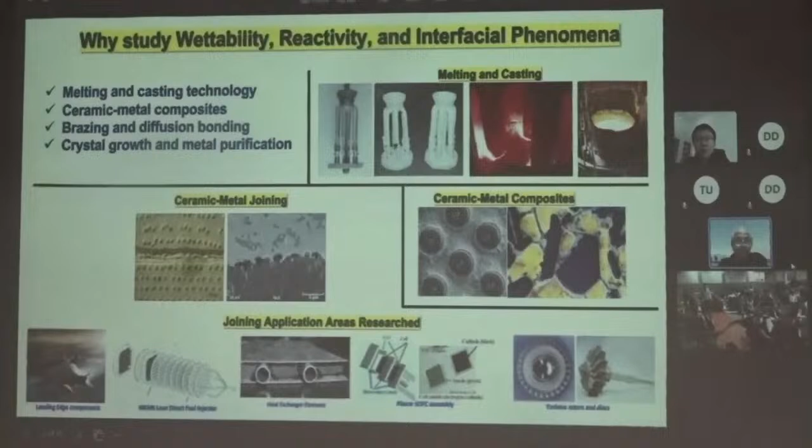Fundamentally, we know that we have reactions, infiltration and adhesion kinds of problems in liquid solid systems. We also have issues of residual stresses because of thermoelastic incompatibility between bonded materials. So we have several different methods to overcome those issues. My focus today is more on the fundamental side, the wettability and reactivity side.

There is a lot of literature data from the 1930s onwards in Ukraine, Russia and other countries. A lot of work was done on wettability at high temperatures. But the problem is that the data are all over the place. Here is an example of literature data on the aluminum-alumina system. If you look at the contact angle versus temperature, the numbers are all over the place. You cannot really make sense out of it.

Part of the reason is that there are no standardized test methods for characterizing interfaces and wettability. Another reason is that contact angles are extremely sensitive to testing conditions. So effectively, you can actually use contact angle measurements to probe the surface and interface. The contact angle is basically the angle that you see between the liquid and the solid through the liquid region here.

Unlike low temperature systems where there is hardly any reaction other than adsorption on the surface, high temperature systems show very complex phenomena. Here are some examples that we have been looking at. Aluminum on carbon: you form aluminum carbide by exothermic reaction, and the carbide crystals are actually ahead of the liquid, so the liquid is spreading on a modified surface. In other systems, like nickel aluminum on magnesium oxide, there is reaction and whisker formation.

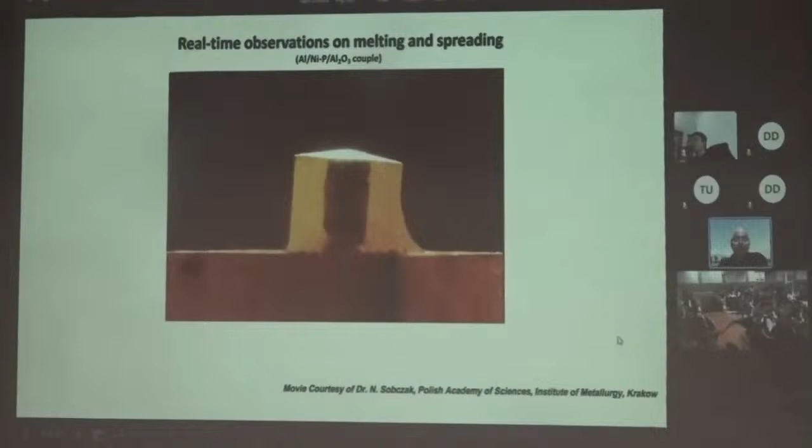So we have been working with this machine jointly and wanted to show you some video clippings here of liquid metal spreading on solids. Now this is just a 2 or 3 millimeter diameter droplet that is spreading on the solid surface here. We know that little droplets have oxide skin. So here looking at aluminum on an alumina substrate with nickel phosphorus coating, look at what happens to the oxide layer here.

You will see that the oxide is really tenacious and the liquid is actually beginning to seep under it. So essentially the oxide forms a cap and liquid begins to spread underneath. And this is just a very small droplet, 2 or 3 millimeters in size, under really high vacuum at high temperatures. So these are the kind of issues that complicate measurements of wettability in many systems. So how do you actually examine these things?

Well, let's look at another example here. You're looking at how at high temperature the oxide will actually disintegrate. You can see the little particles of oxide broke off and you have a cleaner surface here. And this is not just because of high vacuum; even under this vacuum you will have an oxide skin, but the temperature was increased above 1000 Celsius. So there was oxide dissociation.

So how do you handle some of these problems? Well, Dr. Sobczak has this special instrument where she's able to squeeze the little droplet on the substrate. In the normal sessile drop test, the solid is first brought in contact with the solid substrate and they are heated in contact. But the problem here is that you have no control on the time because interactions will begin right in the solid state itself. So if you want to study the liquid-solid reaction, this is not a correct approach.

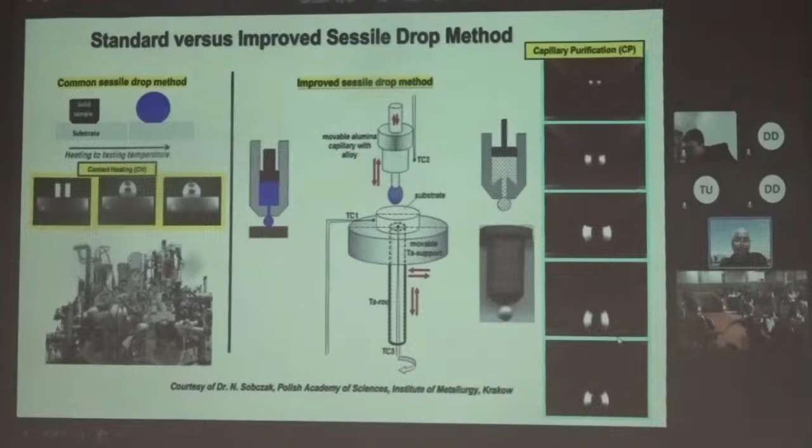So what is done here is the solid metal and substrate are independently heated and at some time they're brought in contact. So this kind of a test allows a more scientific approach to wettability study. So you're looking at a droplet that was squeezed out under high vacuum, and because of the squeezing action, the oxide on the surface was removed.

And when you look at the contact angle data, even at low temperature at 973 Kelvin, you're able to get the same low contact angle that you would have obtained at much higher temperature with contact heating. So what it shows is that a lot of things are happening at high temperature that we cannot really understand by applying the low temperature framework of wettability.

And this is just showing you the same thing, but we are looking at the bond strength after measuring the contact angle. So we let the droplet solidify, then we bisect the droplet and do a shear test to measure the shear strength. So what we have seen is that when you remove the oxide on the surface of the droplet, the bond strength really goes up, even at relatively low temperatures, as compared to if you had contact heating.

One of the things we have been able to do is to push liquid droplets on the surface. So this is actually nickel tungsten on magnesium oxide, not magnesium, but magnesium oxide. And under high vacuum, you are able to push the droplet and open up this interface after a fixed amount of time. And after cooling, you can actually look at the interface and see what kind of reaction occurred.

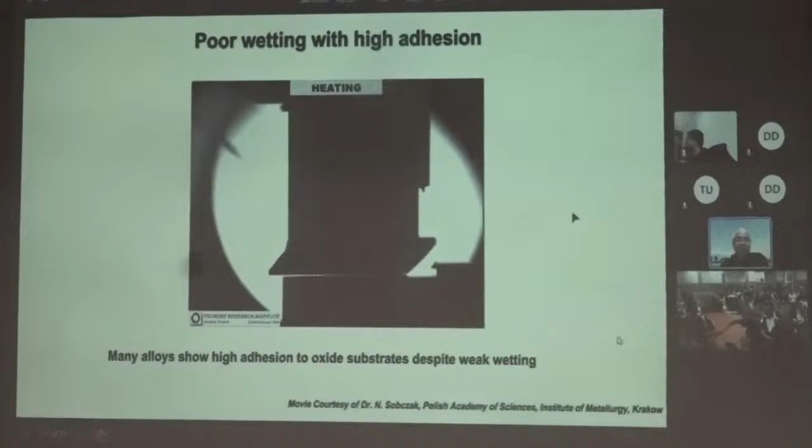Generally, we believe that for high bond strength you need good wettability, but that's not always the case. You can see here that this little ceramic plate gets bonded even though the contact angle measured was pretty high.

Another thing that we have been able to do is to use the drop suction approach, or we can actually rotate the substrate and see the effect of shearing on interface formation. So when we do the suction, after a fixed amount of time, the droplet is pulled out and we are able to open up the surface underneath. And this sample can be transferred right from the tester in vacuum to the X-ray photoelectron spectroscopy system, so it isn't exposed to atmosphere.

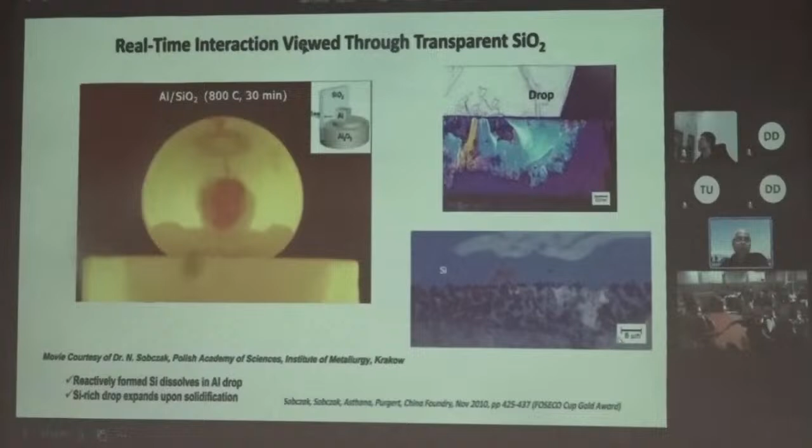Here you're looking at the real-time reaction between aluminum and silica. This is the silica plate, and you're seeing the reaction layer forming through the transparent silica substrate, so you can study in situ the interactions that are taking place. The same thing here: you're looking at several silica plates through which liquid aluminum is permeating and also reacting. The liquid is moving, the reaction layer is forming, so you can see the kinetics of spreading and the kinetics of reaction from this kind of system. A lot of things are happening that we don't see without this kind of instrument.

Another example is wetting and de-wetting. Under high vacuum, when this little droplet melts, there is some reaction taking place and tiny bubbles can form underneath. You will see the drop jump up and down because of the bubbles escaping. You will see that in a few seconds. This is what is happening now. The actual time is almost 30 minutes, but we have high-speed videos here. So there are a lot of effects taking place.

You can see this is an aluminum drop in contact with this magnesium spinel. When you heat it, you can see the bonding here. When you cool, the plate is actually lifted up because the bonding is very good.

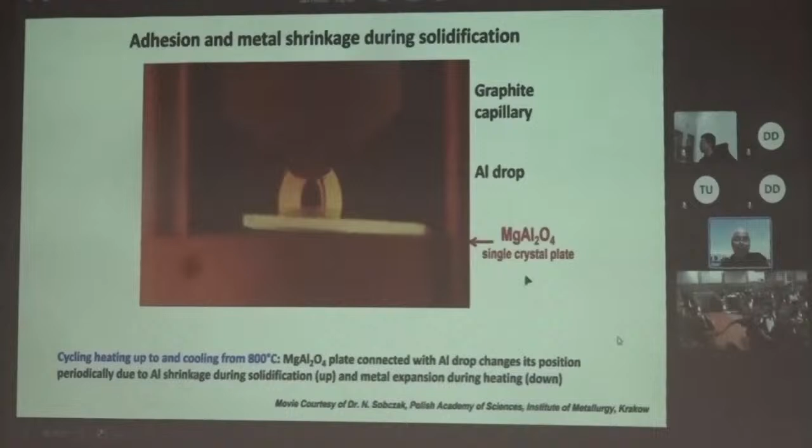Another thing we see is the real-time change in volume. Right now the surface is flat, horizontal, but with reaction it is changing. It is becoming more curved because of the reaction and volumetric change. You can see the surface of the substrate becoming more curved, and that is what causes the contact angle measurements to be in error.

So a lot of these things are happening, and we have been looking at some of these features, but I don't want to take too much time. It's already almost 11:30 here. So in summary, we are able to conduct some special tests that are not possible in the conventional sessile drop test, and we are able to observe some unusual phenomena.

So I just want to know, this droplet wettability problem is always there in composite making or in particles. If it is not properly wetting, then it does not make a coherent bond. So what are the ways you can improve the wettability of any particle when you are making a composite?

So people have been looking at many different things, starting with, I think, the 1970s or even earlier. Subrat Ray and P.K. Rohatgi at IIT Kanpur way back were experimenting with adding magnesium to aluminum. Magnesium, being a surface active element, is able to modify the surface and interface between the solid and the liquid. So magnesium is a well known active agent for composites. People have used different kinds of surface coatings on particulates, electroless coatings of nickel, copper, and other materials.

And if you have a nickel coated or copper coated particle, they will disperse relatively easily compared to uncoated particles. You have to also make sure to preheat the powders or fibers, or remove any sizing on fibers before you bring them in contact with the liquid. So preheating is important. And of course, sometimes preheating can change the surface structure. We have seen that if you have graphite particles and you preheat them, the surface gets modified, more porous. So those are some methods people have used to make composites and improve wettability. Those are practical approaches.

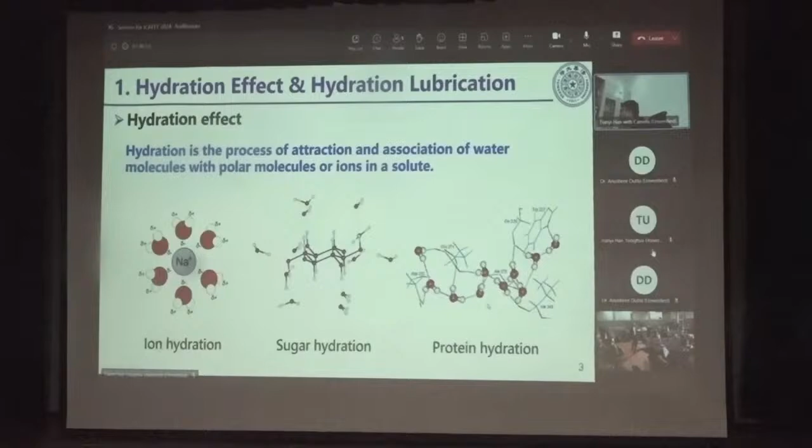Then, when a charged surface is immersed in salt solution, what will happen? The charged surface can absorb hydrated counter ions to form the Stern layer and the diffusion layer.

When two surfaces approach each other to a distance less than 5 Debye lengths, which describes the length of the diffusion layer, we can find a repulsion force called the electric double layer repulsion. If the distance decreases to less than 3 nanometers, another strong repulsion can be found, called the hydration repulsion or hydration force.

Due to this strong hydration repulsion between two charged surfaces, in this literature conducted by Professor Jacob Klein's group, they measured the repulsive force between two mica surfaces.

Here, these are two mica surfaces, and the mica is glued onto the silica lens. What they found was a strong repulsive pressure as high as 10 megapascals, when the distance between the two mica surfaces is very low, usually below 3 nanometers or below 1 nanometer.

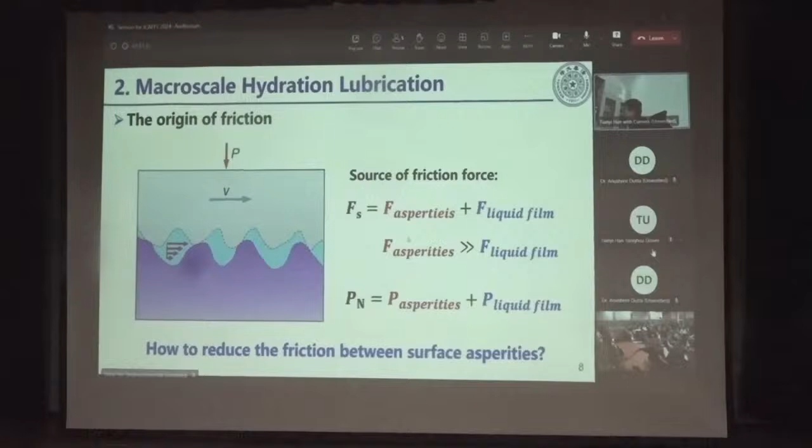Then we proposed a method to form a hydration layer on the asperities surface, and this hydration layer can separate the asperities by the hydration effect, by the hydration repulsion. Then the shear resistance should be reduced greatly.

So first we make a calculation, and we should prove whether it is possible to separate the asperities by hydration effect. We introduced the surface force into the mixed lubrication model, and the surface force consists of van der Waals force, the electric double layer force, and the hydration repulsion. I want to emphasize that the key is the hydration repulsion, because it is a very strong repulsion. From this we can calculate how many contact pressures can be supported by the hydration force.

Let's see the results. First, for the surface with roughness of 6 nanometers, as the surface potential increases, the bearing ratio of the hydration force also increases. And when the surface potential is -25, the hydration effect can bear over 60% of the applied load.

Then if we fix the surface potential at -20, the bearing ratio of the hydration force increases with the decrease of the surface roughness, and the maximum is over 80% if the roughness decreased to 2 nanometers. So from the calculation, we know it is possible to decrease the friction by hydration effect, especially in the mixed lubrication region, because the surface force can support most part of the applied load.

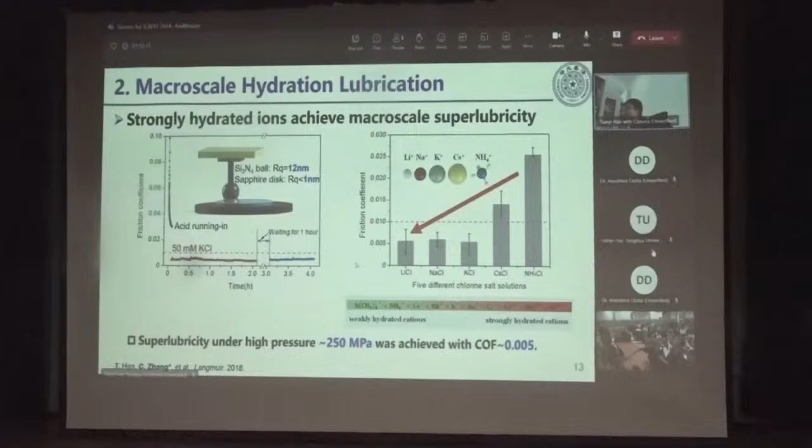By TEM observation, we found a tribo-induced silica layer was generated on the surface of the silicon nitride ball during the running-in period, and this silica layer can increase the surface charge density by more than 50%, which can make the surface absorb more hydrated ions and thus enhance hydration lubrication.

After that, we want to know whether the hydrodynamic effect can contribute to the superlubricity. The hydrodynamic effect means between the two surfaces there's a thick liquid film, and this liquid film can separate the two surfaces. We also did the test at different velocities.

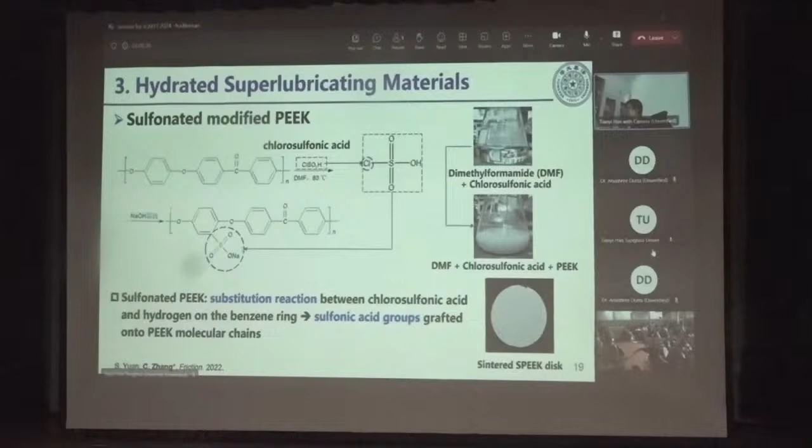Finally, we fabricated journal bearings with the sulfonated modified PEEK and tested them on the journal bearing test machine. During the test, the bearing was lubricated by salt solution, and we found the friction coefficient decreased to less than 0.01. After the test, there was almost no wear on the surface—in other words, the wear of the bearing is quite small. So this is a very good material to make journal bearings.

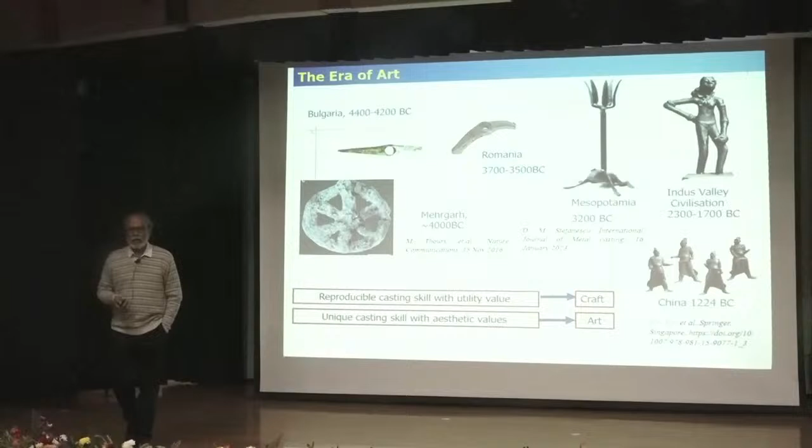So, in ancient time, there were two trends. One, producing reproducible casting with utility value. When you cast an axe or hammer, it has to be reproducible in terms of shape and property. And the other trend was unique casting skill with aesthetic value. Reproducibility was not mandate, but aesthetic value, that is surface lustre, reproduction of the desired shape was important. So that's how it started.

A good span of time, it was people who are engaged in basically these kind of casting, but there was no commercial value of it. There was utility value, aesthetic value. The commercial value started with casting type metal.

Johannes Gutenberg in Germany, he developed movable type printing machine, and it required founding types, letters, and he used lead-tin eutectic. That is a first use of eutectic alloy commercially. Earlier people were aware about the low melting point, fluidity of eutectic alloy, but commercially eutectic alloy, lead-tin alloy was used by Johannes Gutenberg in manufacturing type. And we know that this invention or application changed our civilization and Renaissance in Europe. That is basically the driving force for Renaissance in Europe.

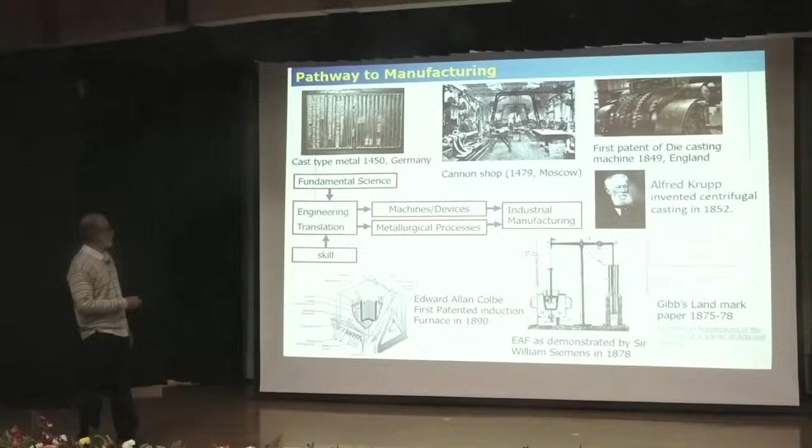And the breakthrough happened with the invention of the electric arc furnace by William Siemens in 1878, followed by the invention of the induction furnace in 1890, which we are still using and which are a major source of manufacturing castings. Okay.

So the second half of the 19th century and early 20th century was mostly popular for design and application of machines, right? And it was based on Gibbs' theory of solidification, and the concept was basically equilibrium. But people gradually understood that Gibbs' concept of equilibrium of heterogeneous systems doesn't work in practical application of solidification.

It is basically non-equilibrium. And a parameter which we are aware of, undercooling, was identified to describe the non-equilibrium features in the solidification process. It is a parameter which is not precise about the material or process. It evolves during the process through the contribution of several parameters like kinetics,

constitutional undercooling, which is basically a function of entropy and free energy; thermal undercooling, which is basically a function of enthalpy; pressure undercooling; curvature undercooling of the solid-liquid interface; kinetic undercooling, which is transport from liquid to solid. R is the radius undercooling, basically curvature. C is constitutional undercooling, then thermal undercooling, pressure undercooling, kinetic undercooling.

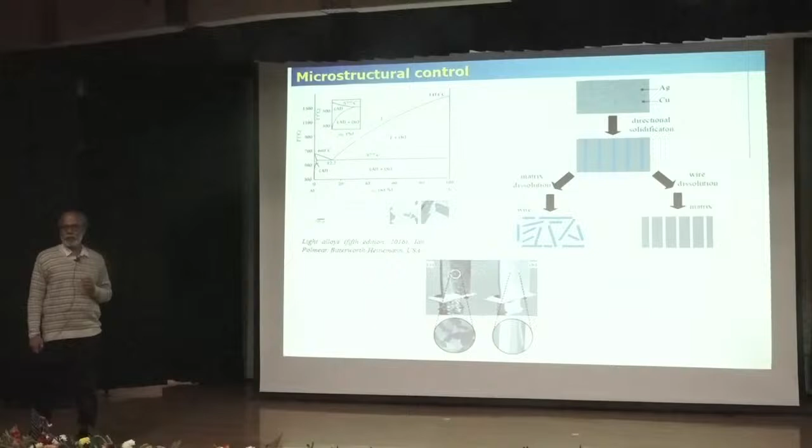Similarly, in aero engine or combustion systems, you need single crystals because there is a typical loading direction where polycrystals do not provide the necessary strength. Usually, when you allow the material to cool, it gives you polycrystal. And you can get rid of this polycrystalline feature by two methods. Either one, you remove the source of nucleation. You remove all the inclusions, all the precipitates, and you impose a unidirectional heat transfer. So that gives rise to columnar grains, and you have mostly low angle boundaries. So these are single crystals, which are very popular in superalloys for application in aero engines.

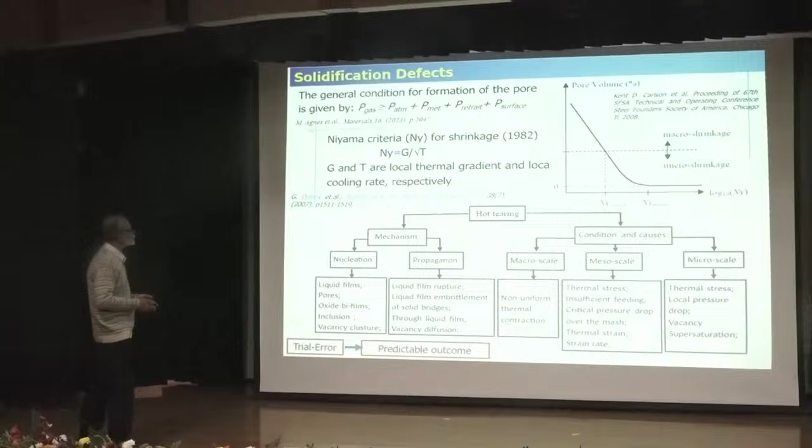Similarly, people determined different criteria for hot tearing, mechanism-wise and concerning conditions and causes. So what I mean, this is a stage. It happened during the second half of the 20th century when people deterministically started predicting the happenings during the casting process. It becomes a bit predictable. Earlier it was only trial and error, so gradually it became predictable.

And once people understood the happenings in the mushy stage, they were interested in getting rid of that. So Spencer and his group at MIT were conducting some experiments on lead-tin alloy to reduce the solidification stress. And they found, sometime around 1970, that when they apply shear stress, the solidification stress reduces.

And it was found that shear rate reduces the viscosity following this non-Newtonian equation, where K is the consistency parameter, n is the flow coefficient, and gamma dot is the strain rate. So they could find a way to reduce the viscosity in the semi-solid stage by application of shear.

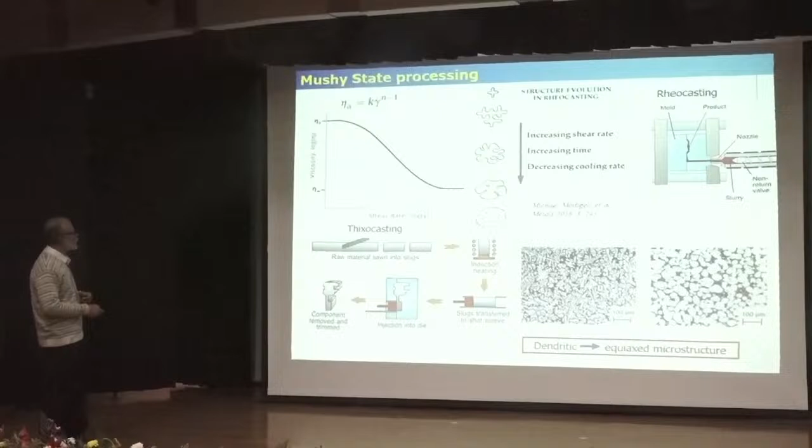Not only that, application of shear fragments the dendrites, and these fragmented dendrites provide nucleation sites for fresh grains. So they could transform the dendritic microstructure to equiaxed microstructure, and that opened up a new direction of processing liquid metal, which they call rheocasting, where liquid metal is forced with some shear force within the mold cavity. It is another version of die casting, but with some shear.

And the other is thixocasting, where a billet is heated between the liquidus and solidus line, that is the semi-solid stage, and forced into a die. So there are different varieties. Professor Amitesh Kumar is working on slope casting, where shear is applied during the movement of liquid through the slope. So there are different processes, but the idea is application of shear.

Now here, some more parameters came into the scenario apart from the shrinkage of the liquid, behavior of gas, convective percolation of liquid within the dendrite. It became the behavior of viscosity and stress of the liquid. So the constitutive framework of semi-solid casting is really complex, and it needs a strong mathematical framework to predict some outcome.

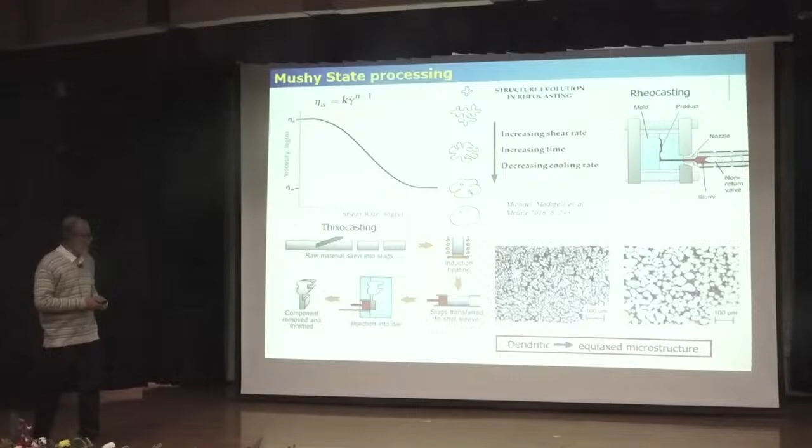And many people are now working in this area, so they are coming across such difficulties, but in the end, we can get rid of dendritic and columnar microstructure, and we can produce equiaxed microstructure. And by that, we can eliminate another step of heat treatment.

Another breakthrough in solidification. Sir, 5 minutes. Sir, 5 minutes more. 5 minutes more? Yeah. Okay, so I'll move fast.

People found that liquid can be supercooled even below the melting temperature if you increase the cooling rate, right? So in 1948, Kauzmann proposed that there must be a temperature, the Kauzmann temperature, above which you can cool the liquid and you can have an amorphous phase. And Pol Duwez at Caltech produced the amorphous phase, but it was a strip of small thickness with a very high cooling rate.

Later on, people started designing multi-component alloys and processing the melt so that they could eliminate sources of nucleation like impurities, etc. And they identified that there are some alloys. I'll go a bit faster. If you give 5 more minutes, I can justify that.

So there is a line which is the solid-liquid equilibrium line. So if you cool the melt within this region below a temperature, you can form glass. And this was the invention of Inoue, and of Caltech again, who could produce metallic glass with 10 millimeter diameter, some useful component. And this is the way you can reduce the cooling rate.

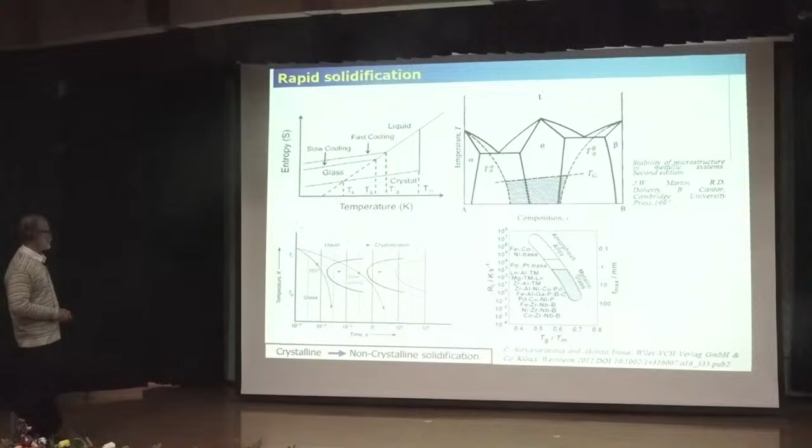I mean, change in slide taking time, that bonus I should have.

Yeah. So basically now people understand the solidification is not a unique phenomenon at a unique scale. It is a convoluted outcome of phenomena happening from nano to meso to micro to meso to macro scale. It is a convoluted effect. So it is basically a multi-scale phenomenon, and people evolved different mathematical frameworks to compute the phenomena happening at different length scales.

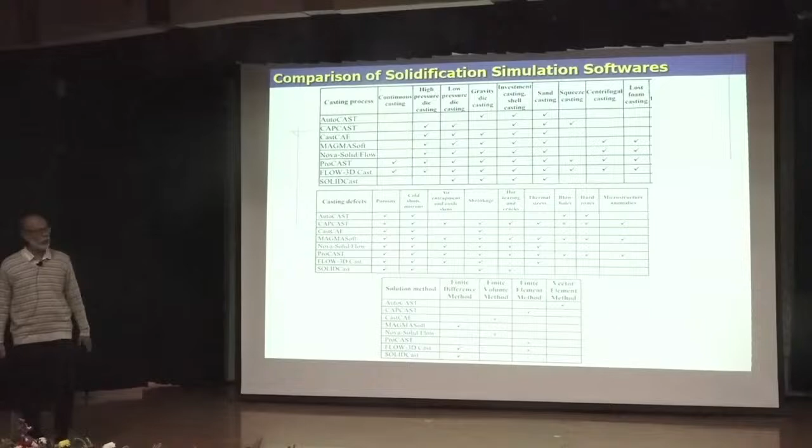So there is a range of simulation software which cover a wide range of casting processing methods and which can predict a wide range of defects using different kinds of CFD simulation software, either finite element, finite difference, finite volume, whatever it is. So with that, so far we have discussed the top-down process. We have discussed the solidification process, some bulk liquid filled in a bulk cavity, and we have allowed it to solidify.

Carl Deckard was a student of metallurgy at Texas University in 1980 when I took the admission. So basically he understood that there are three directions of metal shaping. One is solidification, the other is plastic deformation, and the third is powder metallurgy, sintering. And powder metallurgy is a bottom-up process. So it occurred in his mind, and at that time laser was very, very popular.

In 1970, laser was used for cutting titanium. In 1974, AVCO Everett, a company, evolved a machine for modification of surface using laser. So laser was very attractive, so he thought, can I use laser for sintering powders? And he proposed that to his supervisor, Joe Beaman. They started working together, and in 1987, they got the patent of laser-assisted sintering. And that opened up a new era

of processing metal components, where powder is either dispensed through a nozzle or laid on a plane and is energized by a laser beam, right? So it is a line of sight process. There is a focused, directed energy beam, which scans along a track, repeats the track, and completes a two-dimensional layer, and they build up one layer after another to build up the three-dimensional component.

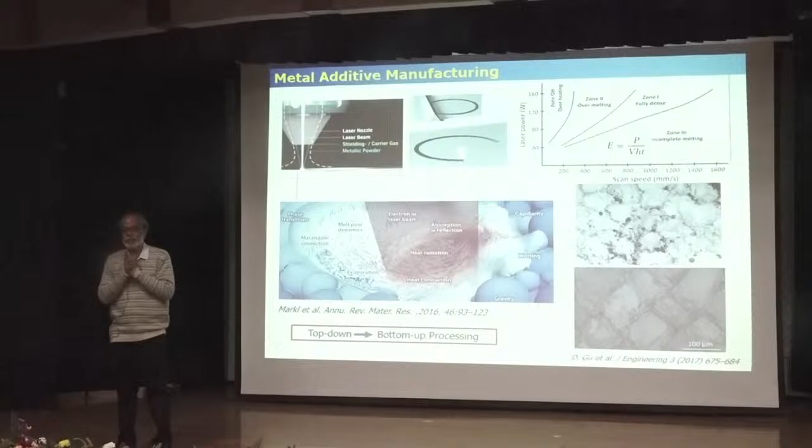You can have very good cameras, very good sensors, you can collect data, collect signals, collect images. But the processing should be very fast, so that when you are scanning one hatch, that data is processed to predict the probable defects there and to control the parameters of the next hatch to compensate for this defect.

Or it has to assess the defects supposed to occur in one layer, and during laying the next layer, you have to control the parameters which will take care of compensating the defect in the previous layer. That should be the kind of automation we are expecting in the future, maybe the next 10 to 20 years.

Then I believe this 3D printing will be effective for commercialization, where we will have products comparable from machine to machine, from one build to another, and from one place to another. That is where the market will rely on you - otherwise it has got no commercial value. Thank you very much.

Thank you, sir. And finally, so we have a nice session. This should be the goal of any manufacturing process. Are you happy to answer any questions? Otherwise, I'm available around.

Professor Chattopadhyay, it's a very brilliant presentation and a very brilliant study. You have done it in such an easy and lucid way that it becomes very easy for non-engineering people to understand the whole thing. And you have actually taken out 6,000 years of history of metal casting in a cup.

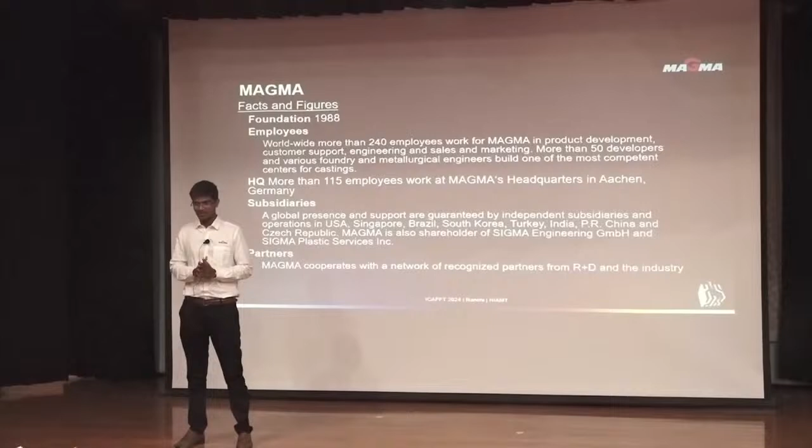Only when we have quality consistent casting can we improve the processes. Here comes Magma into play, where we offer a pinnacle software which enables you to utilize the tool to predict upcoming defects inside the castings. Not only defects related to porosities or restricted filling and solidification, but also related to stresses and deformations. We can speak about heat treatments, what can go wrong with them, and whether we fail to obtain the desired microstructure or mechanical properties. We can also define that. Apart from that, we can check the stresses inside the casting. Due to residual stresses, we have seen some cases of field failures, which we can also predict.

To brief about Magma, it was founded in the year 1988 by Dr. Erwin Flender in Germany, Aachen, where they worked with a small team of experts from metal experts and some developers. Today we have grown to 240 plus employees, working in and around the globe, making Magma's global presence. Apart from this, we also have R&D networks in and around the globe who are working with us to develop the software, aiding support and operations.

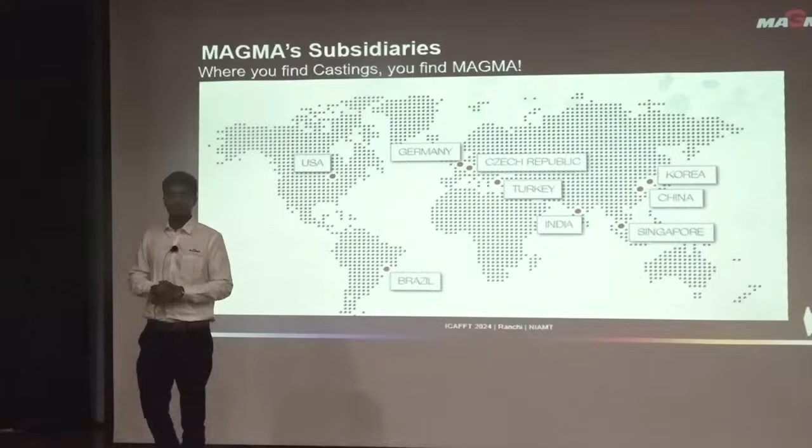We also have 9 plus independent subsidiaries in and around the globe, including India. We have been supporting their operations and developing castings, helping them establish a quality consistent casting premise. These are our customers in and around the globe. We have more than 3,600 plus customers with multiple licenses opted by each. In India, we have more than 136 plus installations with multiple licenses opted by many individuals. And in India, we have a code delivered by the customers: wherever they find the casting, they find Magma.

This is Magma's running history from the past 35 years. It started in 1989 at GIFA as a prototype, and with industrial demand it evolved, developing first a module in LPDC, then later HPDC, iron, steel, convection, segregation, heat treatment, and stresses. We have also developed some modules in CC castings.

In 2023, we came up with the 3rd generation software, which is giving a pinnacle again in prediction of defects in the foundry industry. And in 2024, just last month, we announced the latest update, 6.1, but it is yet to be released in the market industry.

Not just offering the software to use, we also provide training and support operations to customers who have purchased the software from Magmasoft India. Apart from this, we also have training sessions in our Hyderabad office, our headquarters in India, where we provide training with individual dedicated systems so you can use the tools and familiarize yourself efficiently.

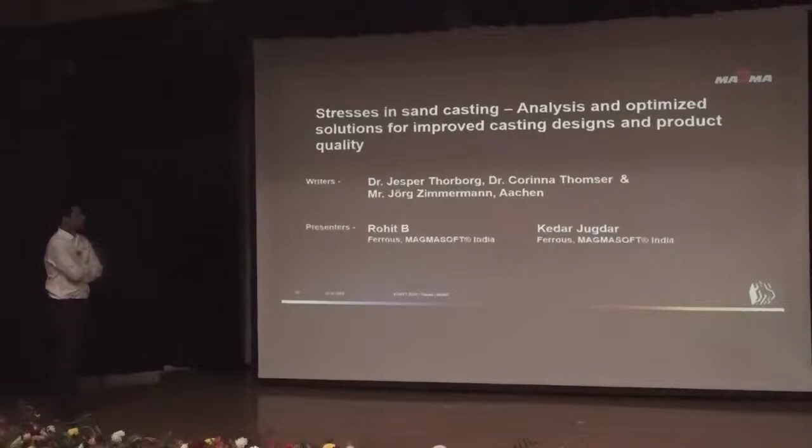Hello again, Johar, to all my NIAMT faculties. They have been very helpful for my academics. I did my master's from this college, so it is a pleasure to be here. This is a paper from Jesper Thorborg, Corinna Thomser, and Zimmermann from Aachen, Germany. We are presenting it on their behalf.

In this paper, we are going to talk about stresses in sand castings and the challenges we face. There are a few case studies we will talk about. First, what are the challenges we face in castings?

Basically, we talk about the stresses which develop during solidification processes. This is a versatile process everybody uses, and design complexity means we can also cast complex designs in sand castings. Stress defects, if we talk about them, are majorly cold cracks and hot tears. So what do residual stresses look like?

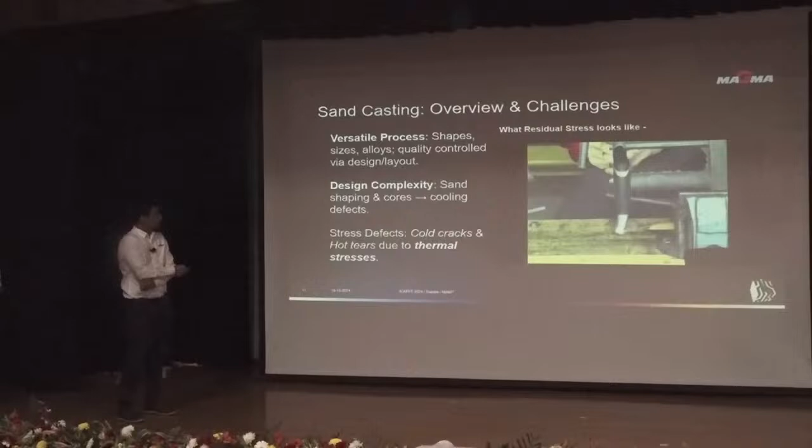This is a demonstration video showing how catastrophic a residual stress break can be, which needs to be eliminated before any supply to customers, because any field failure would be a catastrophic event. This is a demonstration lattice we will talk about, and we will check the simulation results, how we can eliminate them using these tools.

So what are the benefits? Obviously quality assurance and also dimensional accuracy, if we talk about stresses, because there are contractions.

So what do we get from stress simulations? First, in thermal interaction, metal contracts. Sometimes we have expanding sands, like green sands which expand a lot. The outer regions cool first, so that's why tensile stresses build up in castings. Later, during stress evolution while cooling, at high intermediate temperatures hot tears appear, and after solidus temperature there is a chance of cold cracks.

As you can see in the image, stress relaxation over time for large castings has a different impact on the stresses — we call it the creep viscoplastic effect. In large castings, because casting takes a lot of time to cool, stress relaxation per the creep effect will relax the stresses within the castings.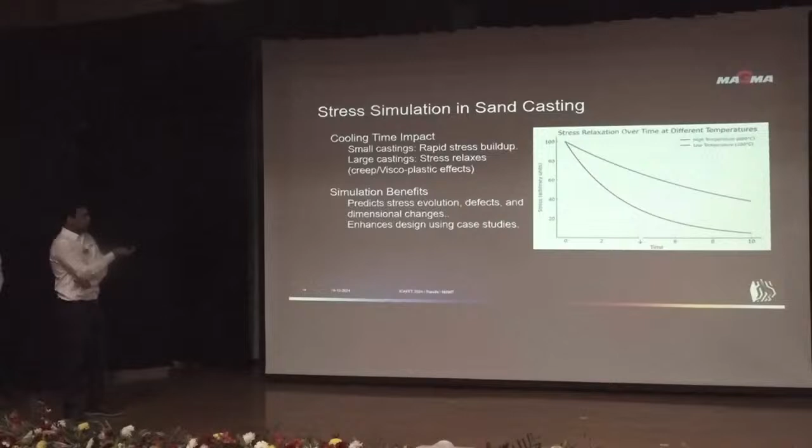So we will talk about a few case studies for large castings. What is the challenge? That is long cooling time. In these cases, we are not able to predict what relaxations are going to happen in our stresses within castings.

So for that we have a unified creep model which will predict time- and temperature-dependent behavior. Here is a case study of a MAN Energy Solutions casting, where the focus is on residual stress state prediction in a cast iron cylinder. We are going to validate a ring core method by milling, creating notches, releasing the stresses, and also simulating them with the software.

So what are the key findings? Stress measurements align better with the unified creep model.

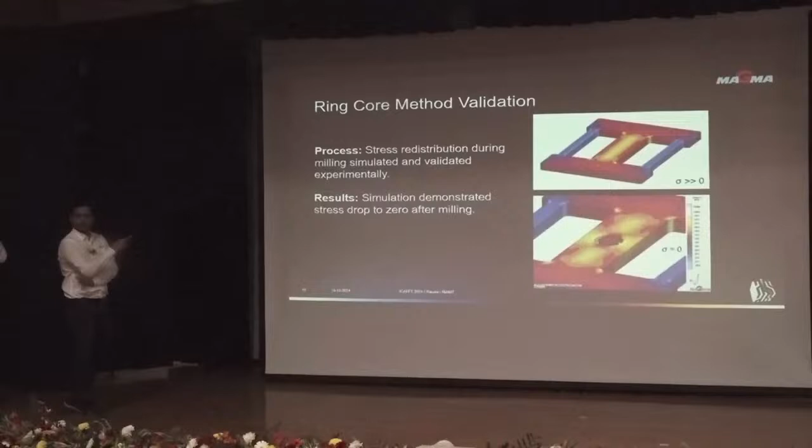This is an example we saw of how the stress lattice was breaking just from making a notch in it. So what happens when we simulate it as a whole piece? There is stress build-up in the thick section of the casting. Later, when we do a ring core method, the simulation demonstrated that there is zero stress remaining in that region.

So there is another case of a gray iron frame. Next, we have to locate the locations in the casting where we are going to measure. So in this casting, what was the challenge? A large stress gradient was detected during simulations. So the sensitivity of the measurement tools, like surface grinding and strain gauges, and the accuracy of where we are going to put them or measure them, needed to be evaluated beforehand.

As we compared the simulation results, there was a similar trend, but quite some difference in the absolute values of the results. But the finding was the critical areas which are prone to high stresses. So using simulation, we planned beforehand where we were going to put the measurements.

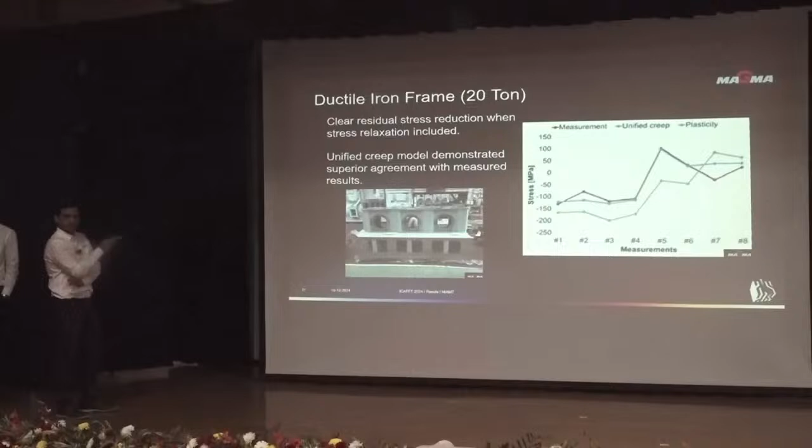So after learning from the previous example, we took another case of a ductile iron frame. We clearly pointed out the places where we were going to use those gauges. What we found is that the unified creep model demonstrated superior agreement. The curves that are matching demonstrate the creep model results.

So what were our observations? The unified creep model successfully showed us the relaxation and how it happens in large castings. The ring core method is very effective, but very sensitive to preparation and measurement location. So we have to identify the locations before doing that.

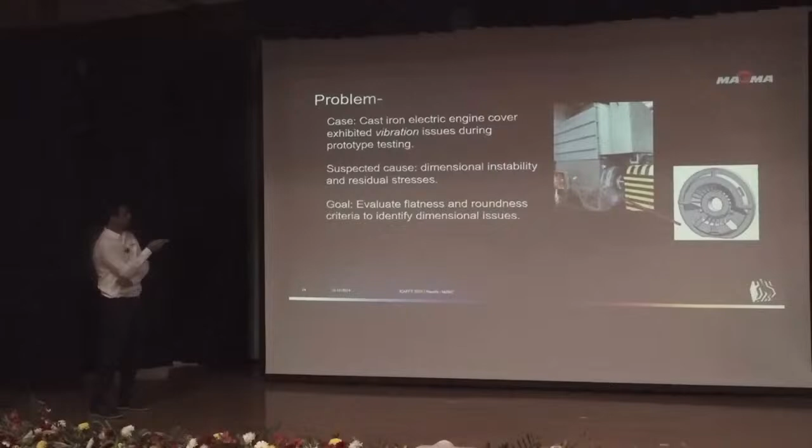So what are other things in stress modules? We always have to fulfill dimensional requirements in castings, such as flatness and roundness. So there is another case study: a cast iron electric engine cover. There were a lot of vibrations in it. During prototype testing, we suspected that dimensional instability and residual stresses might be playing a role. So the goal was to evaluate the flatness and roundness of that casting.

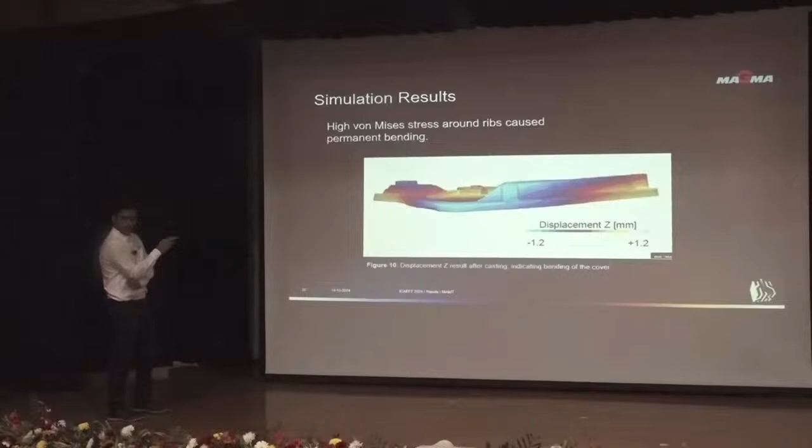So this evaluation showed that heat treatment was not needed for that casting, and there was a lot of money saved. And the vibration issue was unrelated to the process and was resolved by R&D without any process modification.

Another thing for stress is that we have to minimize hot tear risks in some castings. We use DOE, with variable designs, and do simulations on that. So what are the causes of hot tears? Uneven cooling causing thermal contractions, and poor feeding causing porosity. And the results of those hot tears are repair welding and high scrap rates.

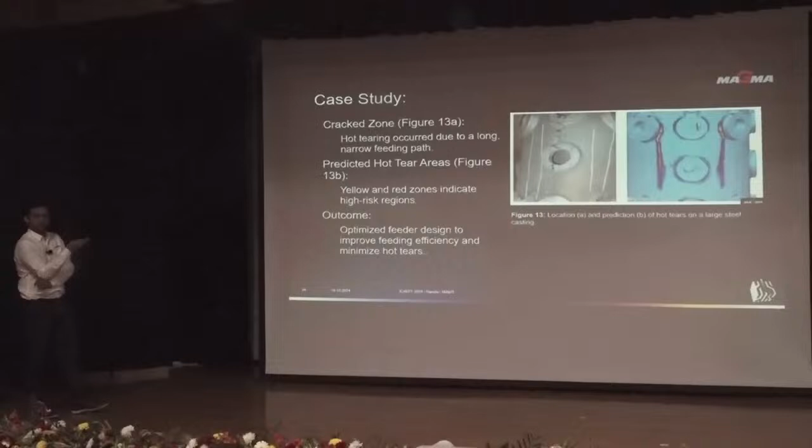So what is the solution? Thermal analysis and identification of the hotspots, and stress and strain analysis to identify the zones wherever strain is developing. We have to pinpoint those areas, and this is a case study where we were able to predict by simulation in which regions hot tears might form. In the actual casting we got the same results. The outcome was an optimum feeder design to increase feeding efficiency, and the reason was that narrow feeding paths were causing hot tears.

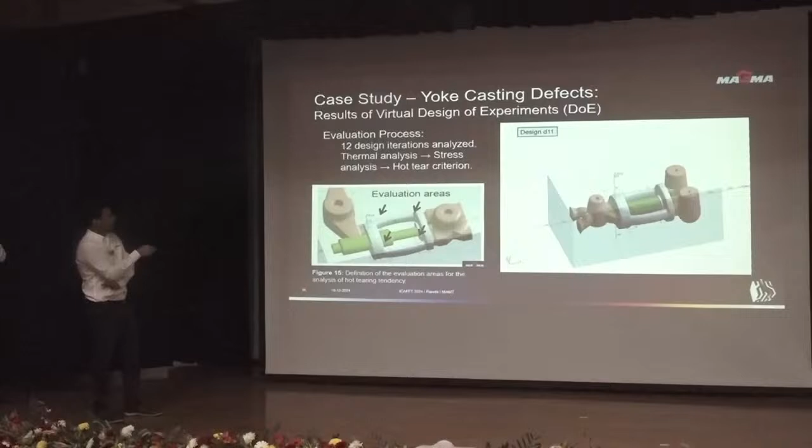Okay, so these are the 12 designs. We tried to change the riser locations and the feeding efficiencies of the risers. So what results did we get? These are the comparisons between all the results, where on the left we kept reduced porosity, and on the right we kept reduced hot tear.

There is an opposing trend: if we increase feeding, that reduces porosity but increases hot tearing, and vice versa. So what is the optimized outcome? In the middle you can see a compromise state where we have less porosity and less hot tear effect.

So this is the best possible compromise. And when we simulated that, what we found out was that the hot tear risk was reduced by 60% in comparison to the previous design, the feeder layout was changed around 30%, and the casting geometry we had to change around 44%. So this was the final result we got, and obviously there was no risk of hot tear anymore.

So, risk of cracks during machining. What happens is that the casting might be okay, but after machining we find that cracks have developed in the casting. So there is another case study where there is a large cast iron frame. It has several holes. Once we cast it, it was okay. But when we started to do drilling and other operations, a crack appeared and the casting got rejected.

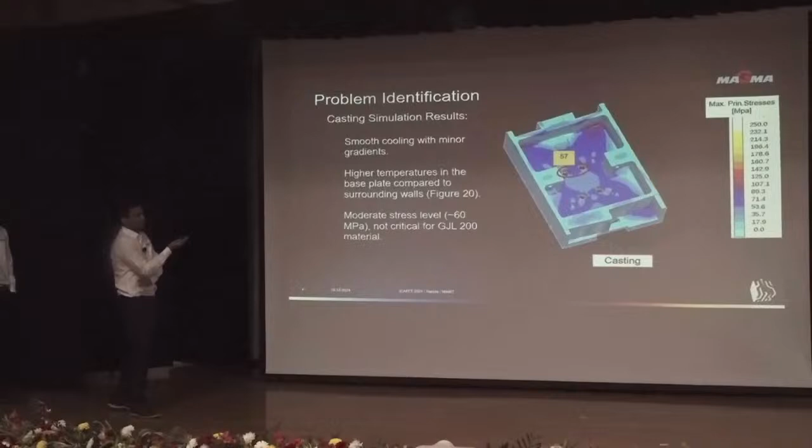So this is the as-cast part which we simulated. Here we find that only 57 MPa of stress is developed there. But after machining, we found that the region had around 234 MPa of stress. So it was having a crack issue in these parts. So what we did, we prepared 3 designs for different methoding and a few process changes.

In the first case, we put a chill between those holes to speed up the cooling rate of that region. Second, we filled those holes and we will machine the holes later. And in the third case, we increased the load carrying area, we added some extra metal to it. So what would be the best result? We will see.

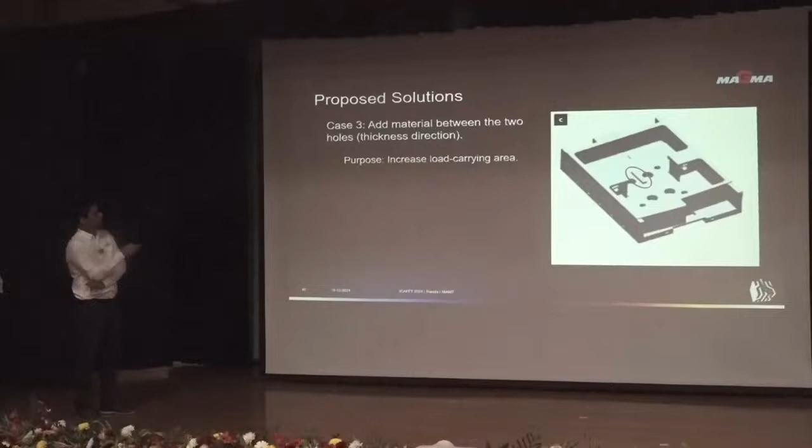So this was the original design where we were getting 234 MPa of stress at that region. But after putting a chill in the casting, it was reduced to 152. And we saw that when we filled the holes and later machined them, it didn't help much. And when we put ribs, there was no improvement either. So the best case was putting a chill between those holes only.

Another thing we can analyze in stress is when we quench the castings. So what do we get? This is a ring brake disc. We are going to use 2 different quenchants, one is water and one is oil, and 2 different quench conditions, one homogeneous and the second inhomogeneous. The objective is to minimize the distortion during the quenching process.

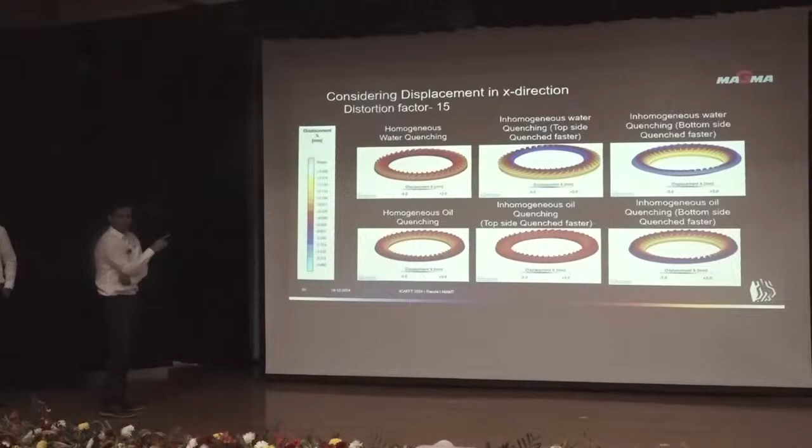So these are the permutations and combinations we get: homogeneous water quenching, inhomogeneous water quenching, and the same with oil. What we found is that in the 5th image we have the least distortion in the X direction. The distortion is scaled by a factor of 15 to visualize better. The maximum difference is only 1 in the X direction. So this is the best case for us, where the top side was quenched faster, and the other 5 cases were eliminated.

And there is one more thing, that is integrated distortion control in casting during heat treatment. This is a very big turbine blade, which has a size of 4.5 to 3.5. Our aim was to minimize the deformation during solidification and cooling and also minimize the deformation during heat treatment.

What we see here is that the initial maximum deviation was 22 mm. The images are a little blurred, but you can see by the color. But with pre-shaping, if you get the results from simulation, we can do pre-shaping CAD adjustments, and we reduced the deviation to 6 mm. So what was the outcome? We made accurate patterns of 6 blades, did 3D scanning, and found these results. The green color shows the simulation results, and the blue shows the actual measurements.

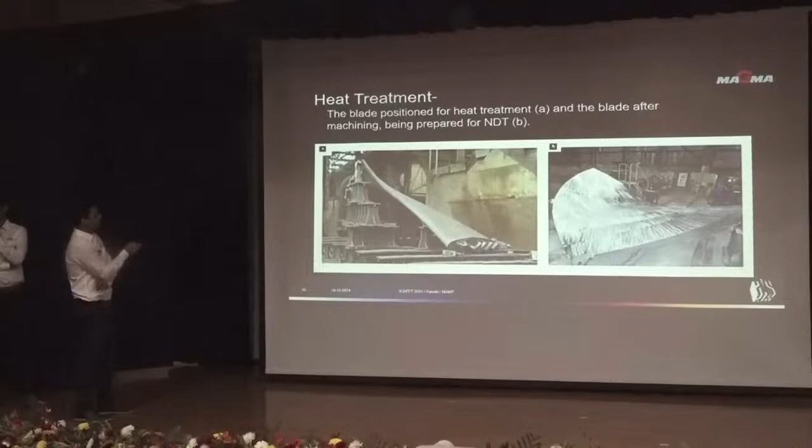So this is how the blades were positioned for heat treatment and, after machining, prepared for NDT. What we found is that during heat treatment, the relaxation at high temperature was very good in the core or thick areas of the casting. During quenching, stresses increased, but they were acceptable at the end of the cycle. It was only around 20 MPa, so that was acceptable in thick sections also.

So also the direction of deformation we got from the simulation, that it will be upward in center and downward in the thick sections. And the deviation of 6 to 9 mm was observed, which was within tolerance.

Okay, thank you, sir. Thank you. So both of you have presented nicely. So any questions? I think sir first asked something. Okay. Well, no, I mean, it's a good presentation.

What I feel, the simulation software we use works with the basic principle of thermal equilibrium and cooling rate. And what we look forward to is to have an even cooling rate all along the geometry of a casting, basically, right? So when we do the simulation for any component, we select the methoding through the simulation software, what should be the feeder, what should be the in-gates and all. We take care of all these things. And then we look forward to have a proper casting out of that.

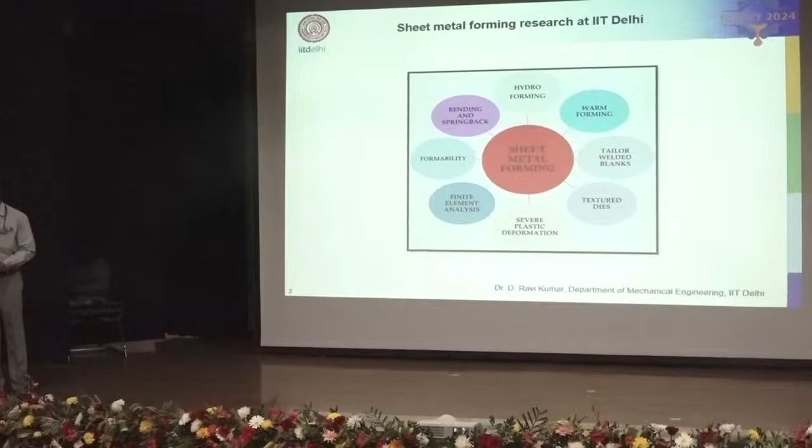So before I go to my talk, I'll just take 1 minute to give an overview of what we are doing at IIT Delhi. We have been involved in metal forming research at IIT Delhi for the last 26 years. My primary area of work is sheet metal forming, and within it we work on various aspects, both experimental as well as simulation work, including the finite element analysis of various conventional and unconventional sheet metal forming processes, formability analysis, prediction of defects and

spring back, and unconventional processes like hydroforming, warm forming, forming with tailor welded blanks, deep drawing with textured dies, and so on. We are also working on severe plastic deformation to enhance the properties of sheet metals. Apart from sheet metal forming, some of my students are also working on bulk forming processes such as rolling, extrusion, forging, and so on.

So these are some of the facilities that we have in our sheet metal forming laboratory at IIT Delhi. We have a customized formability testing machine, and a few hydraulic presses equipped with computerized data acquisition systems with tooling for various sheet metal forming processes. We have a laser grid marking machine for strain measurement, and a few software for simulating metal forming processes like QForm, Dynaform, AutoForm, so all kinds of forms. And then we have a cold rolling mill which is also used for cryo rolling of aluminum alloys, and a few other such facilities.

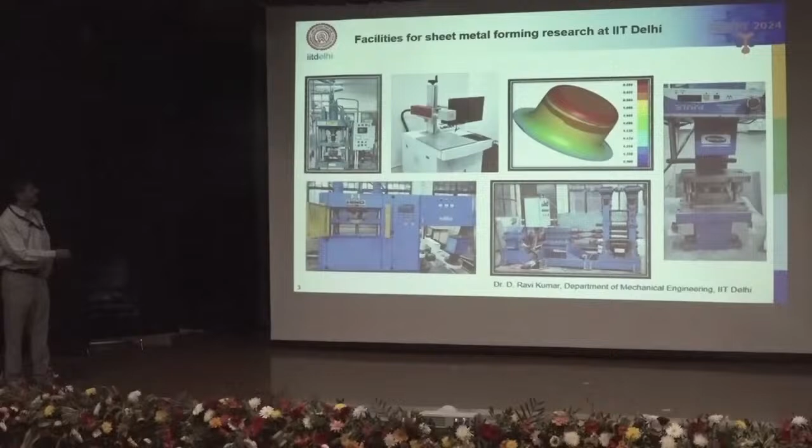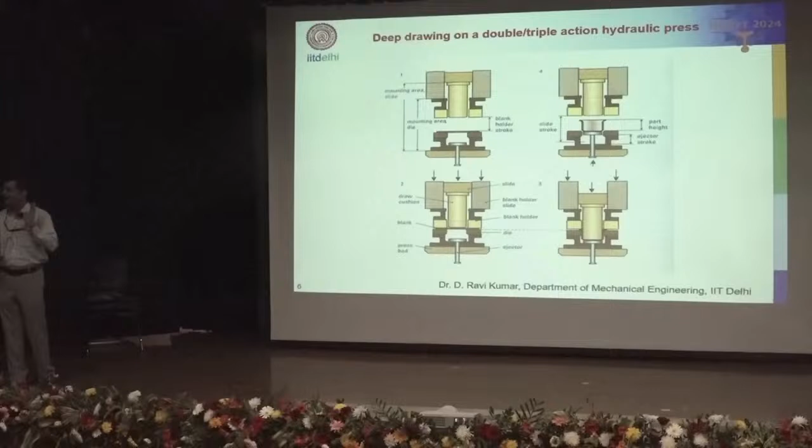So now, coming to the lightweighting of automotive sheet metal parts. In the automotive industry, something that everybody talks about is a lightweight vehicle. We want to bring down the weight so that CO2 emissions can be reduced, fuel economy can be improved, and so on. So how do we do that? Just as an example, a 10% reduction in car weight can lead to a 6 to 8% decrease in fuel consumption. And sheet metal parts like body panels and various tubular parts in a four-wheeler constitute about 30 to 40% of the total weight of a car.

And it's about 30 to 35% in a two-wheeler. So if we can bring down the weight of the sheet metal parts, the overall weight of the vehicle can also be brought down. So what are the different approaches for lightweighting automotive sheet metal parts? Some of those techniques I would like to discuss with some case studies, including our own work.

So one is, in conventional forming, it is possible to reduce the weight of a sheet metal part by reducing the initial blank thickness, either by using the existing grade, if it is not possible, or if we have a better advantage, we can go for an alternate grade and reduce thickness further so that we can bring down the weight. And second one is by using tailored blanks, either tailor welded blanks or tailor heat treated blanks, to achieve certain specific advantages apart from reducing the weight.

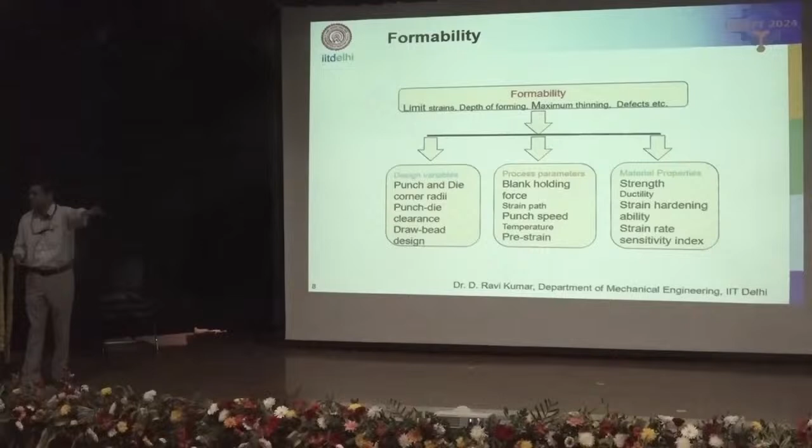Apart from the material properties, we are also concerned with design variables and process variables. When you design tooling for a given forming operation, the design variables are fixed at that stage. What you can control during the process is the process variables, like blank holding force, punch speed, the temperature, and so on. But unfortunately, we don't have any one single index to say the overall formability of the sheet is this much. We have a large number of tests to evaluate formability.

Similarly, there are many other tests, the Erichsen cup test, Fukui conical cup test, and so on. In every test, the mode of deformation is different, so every test gives you the formability of a material in one particular mode of deformation. But if I want the limit strains of a sheet metal in all possible modes of deformation, we evaluate a forming limit diagram or forming limit curve. This is a plot between major principal strain and minor principal strain measured on the surface of a sheet after deformation.

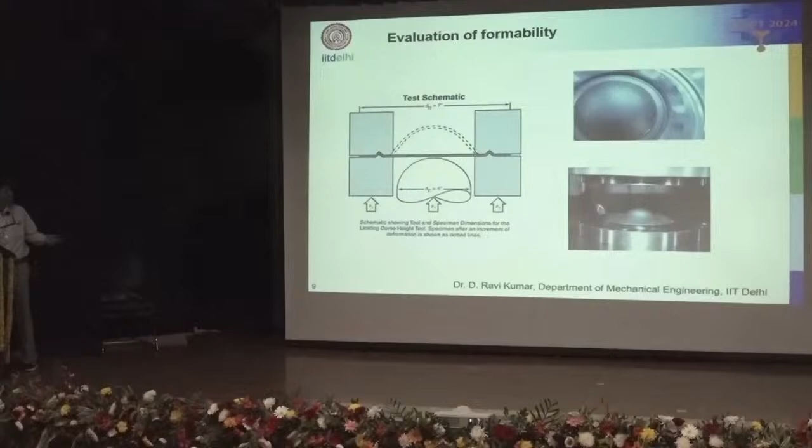This is presently being manufactured by most two-wheelers using one grade called extra deep drawing steel of 0.8 mm thickness, irrespective of the model and irrespective of the forming severity. So we tried a few different options to bring down the weight of this fuel tank, and yet it should meet the required functional

regulations. One option is reducing the initial sheet thickness with the same grade - what is the minimum thickness at which it can be produced? And if we change the grade to a better grade with better formability, what will be the minimum sheet thickness with which it can be produced?

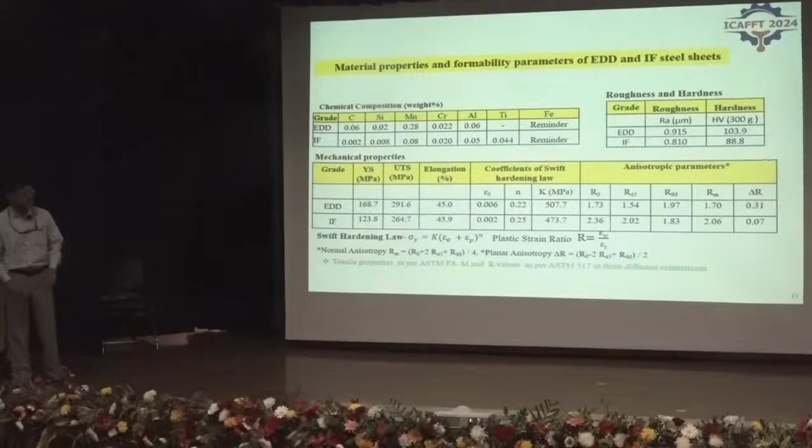You can see here the comparison of material properties, the general mechanical properties and formability parameters of these two - extra deep drawing steel, and the second one is IF steel, which is interstitial free steel. Even though the strength of IF steel is slightly lower than EDD steel, the strain hardening exponent and the anisotropic parameters are higher, indicating better stretchability and drawability, so the overall formability of IF steel is definitely better than that of EDD steel.

One of the major requirements is that in the final formed part, the minimum thickness at any point, at any location, cannot go less than 0.5 mm. So that was one of the requirements apart from the other things.

When we changed the grade to IF steel, we have seen by doing a large number of simulations that the sheet thickness can be further reduced to 0.65 mm. That would reduce the weight even more, but it would slightly cost more because IF steel is costlier than EDD steel. So we need to see where is the balance.

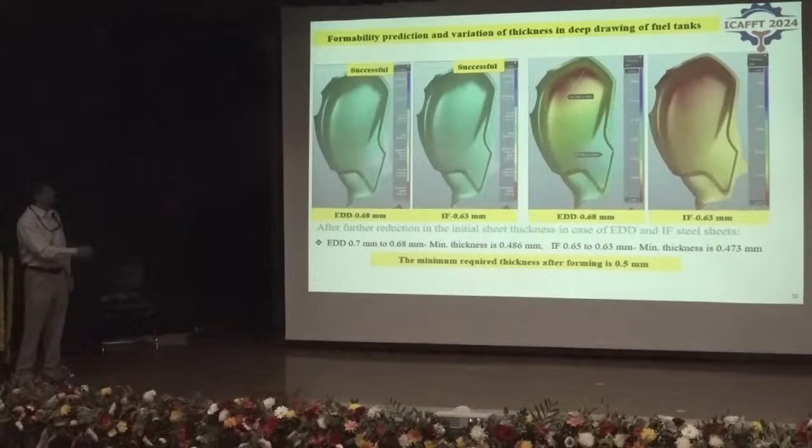So therefore, we finally concluded that 0.7 and 0.65 are the minimum possible sheet thicknesses at which the fuel tank can be manufactured. So then with these new thicknesses and the new grades, we have carried out the actual fuel tank manufacturing in the industry.

And the next alternative is to use aluminum alloys in place of steel. So we have chosen two aluminum alloys, both belonging to the 5000 series, because the 5000 series belongs to work hardening alloys. They have very high work hardening ability.

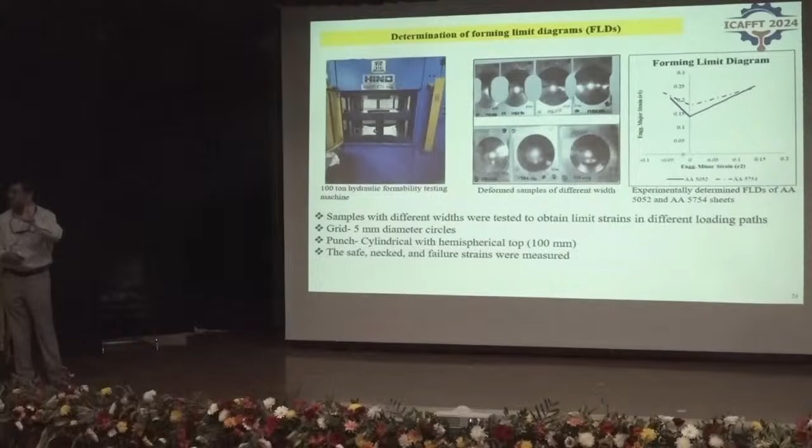So we started the simulations with 1 mm, and this is the determination of forming limit curves for both the materials experimentally, and these forming limit curves have been used as the failure criterion in the simulations.

And this shows the predicted results and the experimental results on aluminum alloys fuel tank manufacturing, the actual fuel tank. So we started with 1 mm. In both the cases, we were not able to form completely to the required depth. You can see 5052 failed when the part depth was 122 mm, and 5754 failed at 162 mm, whereas the required depth was like 180 mm.

So experimentally also you can see that there was a complete crack, and there was excessive thinning, and the material failed in both cases. This was anyway expected because the sheet thickness is equal to steel sheet thickness. And experimentally measured strains also, you can see they have far exceeded the forming limit curve, and this was what was expected.

So then we predicted formability of these two alloys for fuel tank manufacturing by enhancing the sheet thickness. So we went up to 2 mm, and for 5754 we found that if the sheet thickness can be increased to 2 mm, it can be successfully formed, and the minimum thickness would be 1.4 mm.

I know the aluminum alloys are costlier, and if you increase the sheet thickness, it would be even costlier. But the thing is that the weight of the component will still be lower even if it is 2 mm. But in the case of 5052, even at 2 mm, the predictions were unsuccessful forming.

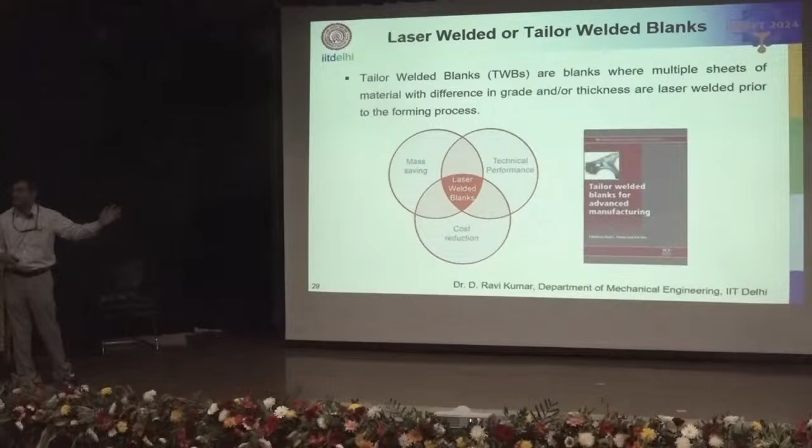In the 90s, it was a new concept, but now if you see, the tailor welded blanks are being used in various automobiles, in various four-wheelers and so on. So the main advantages of these tailor welded blanks are mass saving, cost saving, and better technical performance. You can see here some books are even written exclusively on tailor welded blanks for advanced manufacturing.

So this is the process details. Let's suppose conventionally this component contains 5 different parts, and they have to be formed separately and they are spot welded. But now using tailor welded blanks, what we can do is that we can choose the correct thickness or the correct grade for 5 different blanks, which are cut according to the required shape and size. Prior to forming, they're all laser welded, okay?

Because laser welding is a very fast welding operation, and it also gives you a very, very narrow heat affected zone. So after laser welding, this composite blank is formed into the final component in one single forming operation. So 5 forming operations have become one single forming operation, and all the subsequent spot welding operations have been eliminated. And so the process becomes much faster and easier.

More than that, the main advantage is that the design engineer now has a lot of flexibility to choose what kind of thickness he should use at what location, what grade of steel he should use at that particular location, so that he can tailor the blank according to the final functional requirements. So wherever you require higher stiffness, we can have higher thickness. And wherever you require higher strength, you can use a high strength steel grade, and in other portions you can have a low strength grade. So because of this flexibility, the tailor welded blanks have found a lot of applications in automobiles.

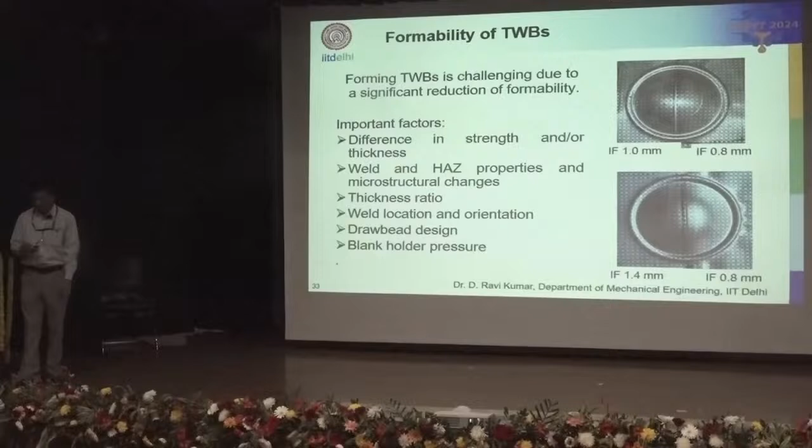Look at the weld and HAZ properties, the thickness ratio, okay, and the weld location and orientation, because the weld orientation is also extremely important. Here you can see examples of two parts where in one case we have a longitudinal weld and in the other one we have a transverse weld. So the orientation of the weld with respect to the direction of loading also plays an important role. You can see on the right hand side the tailor welded blanks which are like a normal sheet continuously.

So I will just skip this because I don't have much time.

So lastly, I talked about alternate forming processes for enhancement of formability so that we can further bring down the weight of vehicles. Since aluminum alloys are lightweight, we are always attracted towards them. But one major drawback is their formability at room temperature is generally inferior when compared to many low carbon steel grades. So therefore, one of the techniques to enhance formability of aluminum alloys is warm forming.

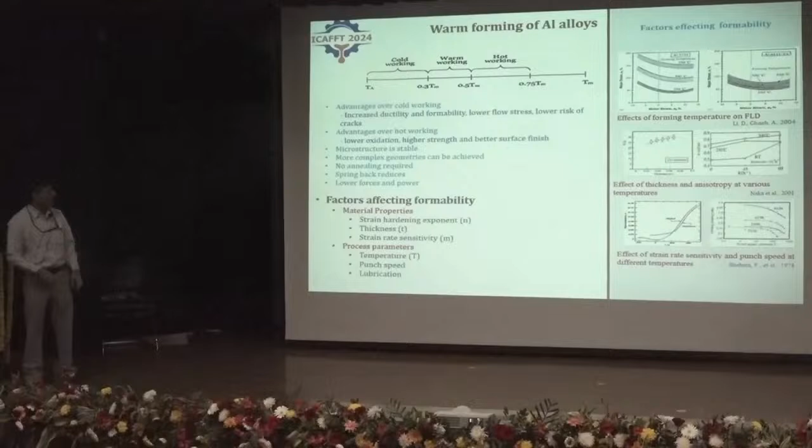But the parameters that affect formability in the warm working temperature region are much more complicated, because we have certain parameters related to high temperature. One is temperature itself, the other one is the properties which get influenced by temperature, mainly the strain rate sensitivity index. Because for most of the common metals, the strain rate sensitivity index at room temperature is close to 0. So the change in punch speed is not a major parameter. But when you are working at elevated temperature, the strain rate sensitivity becomes extremely important. So therefore, the punch speed and all that also become a factor.

So lastly, hydroforming is another alternate process which can be used to enhance formability of lightweight materials or materials with lower formability in conventional forming. Hydroforming is of two types. One is tube hydroforming, the other one is sheet hydroforming. In tube hydroforming, a tube is internally pressurized such that the tube bulges out and it conforms to the die configuration. Sometimes in addition to internal fluid pressure, we also apply axial load such that the material deformation becomes more precise and you can form accurate components.

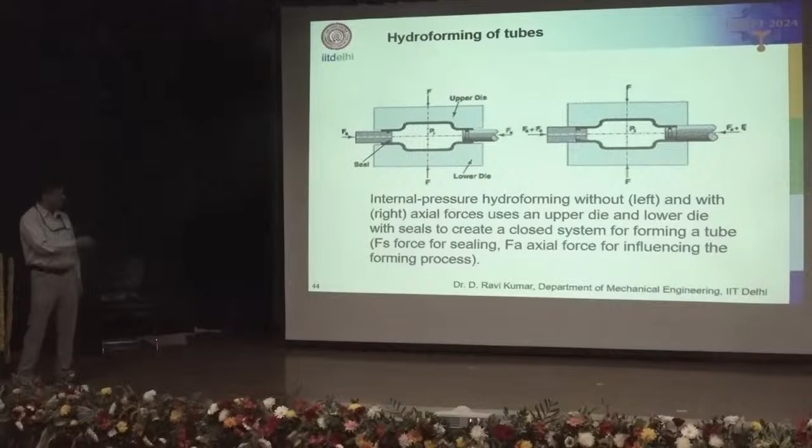So I am mostly interested in sheet hydroforming. In sheet hydroforming, we use fluid pressure to bulge a sheet or to draw a sheet into a die cavity. That is pure hydroforming. The other alternative is you form the component by a conventional mechanical force, and at the same time the sheet metal is subjected to counter pressure by the fluid. So that gives you some special advantages.

So lastly, I just want to show one more small case study. I'm going back to the same fuel tank again. Now we have considered a fuel tank with much larger depth. The young people know in bikes you get more intricately designed fuel tanks, and some of the fuel tanks have very large depth. This particular model has 220 mm depth.

So we have done simulations to see whether this fuel tank with large depth can be manufactured as one single component by hydroforming, which is not possible by conventional forming. And before that, we found out they are presently using EDD 0.8 mm steel, so we have used the same material so that there is no need for any change of material.

And we have found out initially from simulations as well as experiments, lab scale experiments, what is the maximum pressure up to which this sheet can be formed by hydroforming. And we have found out that it can go up to nearly 20 to 21 MPa, that is 200 to 210 bar. Okay. So after experimental validation of this, then we carried out the hydroforming simulations.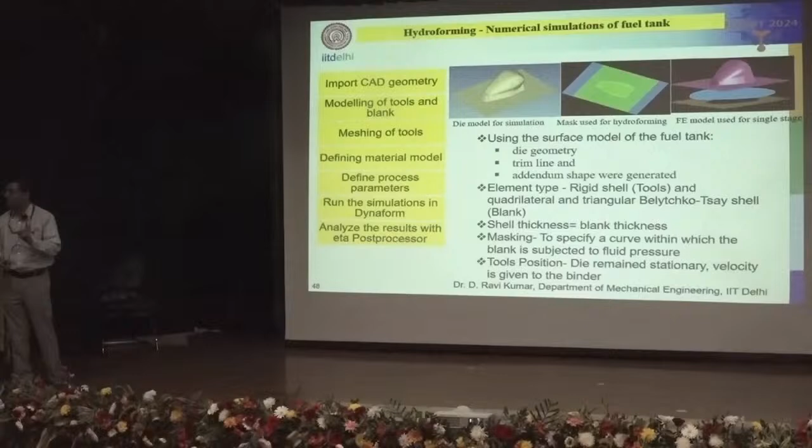And so since we were unable to form the entire depth in one single stage hydroforming, we have gone for two-stage hydroforming. In the first stage, we were able to form up to 184 mm, and then this simulation data has been imported as the initial starting data for the second stage. And in the second stage simulation, we could successfully form the fuel tank up to the required depth of 220 mm.

Okay, but the only problem that we have seen is that the minimum thickness after second stage forming has gone down below 0.5 mm, which is the present requirement for a fuel tank. So what we have thought is that by introducing an intermediate annealing treatment between the first stage and second stage, it is possible further to improve the strain distribution and reduce maximum thinning. So with that optimization, it will be possible to produce this large depth fuel tank in two-stage hydroforming with minimum required thickness above the required value. So this is just another case study for hydroforming.

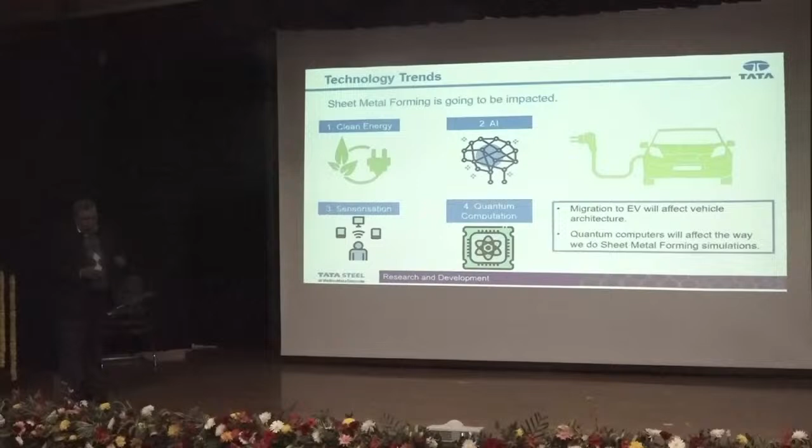Now, one immediate impact of this is, once the crash happens at the same speed, you have to absorb more energy. And the formula is very simple, half mv squared. So if m increases, the energy absorption capacity of the vehicle has to be increased, and therefore you have only two options. Either you increase the thickness, which will adversely impact the range of the vehicle, or you use high tensile steels, so that you absorb more energy without increasing the weight. Therefore, the steel industry has for some time now been working extensively in developing newer advanced high strength steels which can be used by the industry.

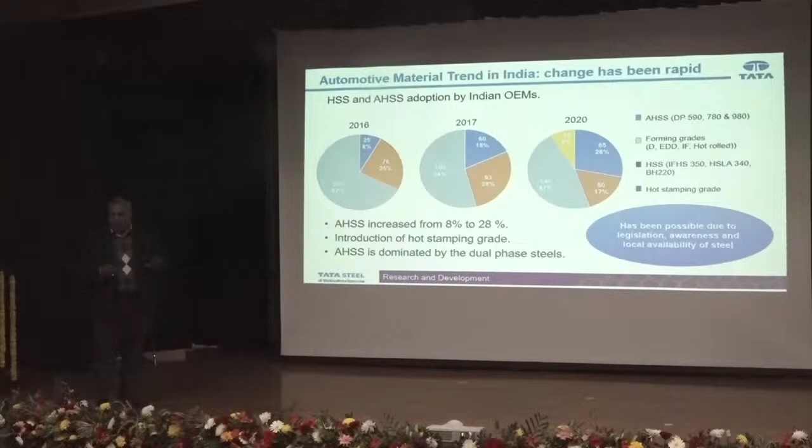But at the same time, if you look at the industry trend from 2016 to 2020, the usage of these advanced high strength steels has increased significantly. And this change has been much more rapid if you compare the rate of change with the European market. And the reason is much of the knowledge for both production and usage of these steels is now known. Initially, when these steels were being developed, produced and used, there were a lot of challenges. Those have been more or less addressed. So the information is readily available, so the adoption is much faster.

Now the thing is, why should a steel company actually work in that area? Like I said, we actually produce steel and sell a significant amount of steel to the automotive industry. So we also feel that it's our duty to also give the know-how for using these steels to the users: how to use these steels, how to solve the problems associated with these steels. And one of the most common ways of solving those problems is basically simulation.

Okay, the finite element simulation; a large part of that was already covered in the previous talk. However, there is a challenge. And the challenge is the simulation accuracy of the commercial software is still not that good for certain types of steel under certain conditions. So I'll just show you what those conditions are. But before that, I'll try to bring in the concept of a strain path, because I am going to use this quite a few times during my talk.

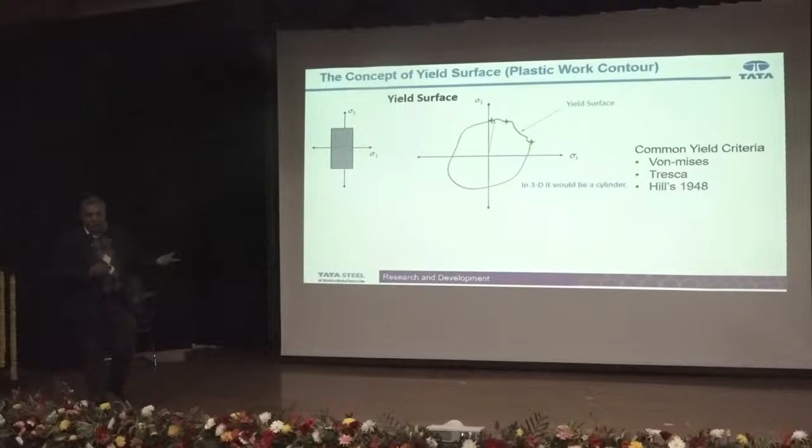Only thing is that they gave the equation, and later it was proved through experiments that each point actually lies on those surfaces. So actually we can give our own equation, right? The easiest way is just to give an nth order polynomial which will fit any sort of curve. However, this only tells you the initial yielding. What happens if you further deform it? So the evolution of this surface. This gives you the initial one, but there are two issues: the shape of the surface and the further evolution.

The shape is basically related to the texture of the material, because exactly what shape it will be depends on the texture. And further evolution is the hardening. Now the hardening is actually very, very complicated, because depending on what strain path you give, the further evolution is going to be impacted, right? However, it is very, very complicated to model that in any mathematical framework. So people have tried to simplify it.

One of the easiest simplifications is isotropic hardening. What is isotropic hardening? You just say that irrespective of what deformation path you assume, the yield stress is going to increase by equal amount in all directions.

This means if I give a simple tensile deformation in this direction, it has increased from here to here because of strain hardening, but it has also increased in the reverse direction. So if I deform a small amount in tension and then do compression, it will tell me the same yield stress, right?

However, the reality is not like that. The Bauschinger effect is a well-known phenomena - it's actually lower. So it's not the correct representation, but it's very simple. 95% of the simulations in the industry actually use this, and therefore one of the reasons the accuracy is not there.

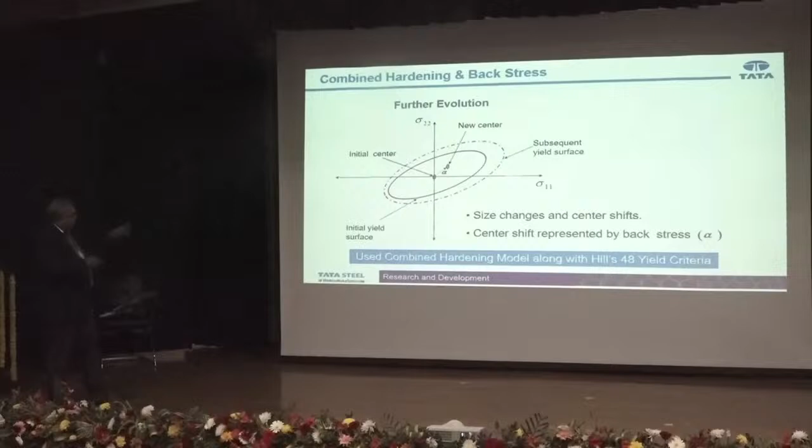A little bit more complicated, you say it doesn't only increase in size, but it also translates. That rate of translation and the direction of translation will depend on the material and the deformation path. You have to devise some experimental procedure to characterize that, because you have to calculate the rate and direction of translation through some experiment - the model itself will not work unless you give some material input. This is called the combined hardening model.

Now I'm going to show you some applications of this. In Tata Steel, we have developed in-house advanced material models based on combined hardening models, which give us better accuracy compared to available commercial softwares like PAMSTAMP, LS-DYNA, or ABAQUS. Of course, some of them have also started using advanced material models now, but this gives better accuracy.

Let me show you some examples. So what we did is we designed this experiment, a very simple but very good experiment for simulating non-proportional deformation.

Here we made a hat section. In this region, it's going to be bending and bending - basically straightening. So the deformation will be plane strain tension, unloading, and then plane strain compression. That is how it is going to be.

What we did is we added a little bit of complexity. We took samples - this was the base material, fully annealed samples. Then we also took this material and gave some pre-strain - we did tensile deformation of about 5%, made samples from the center, and then did the 2D draw.

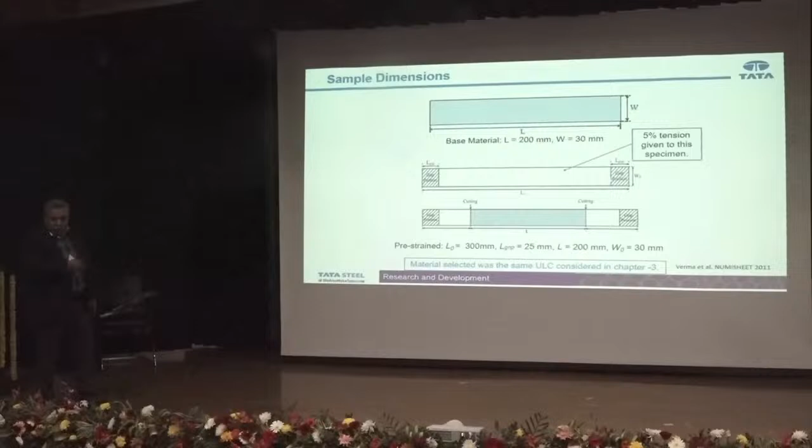So what does this mean? It means in the second case, we do deformation in this direction, unloading, and then make the hat. So the top layer of the material will experience deformation like tension, then unloading, then plane strain tension. This is a non-linear deformation path, done in a controlled manner.

Now the simulations were done. This is the experimental results - 3 samples were tested just to check repeatability, and the repeatability was very good. And then this is the pre-strain case - here also 3 samples were tested and the repeatability was very good.

Then the comparison between the two was done for the shape, the experimental comparison. You can see the pre-strain is having higher spring back, and the reason is because of the pre-straining - due to strain hardening, the strength has increased, and since the strength has increased, the spring back will be higher.

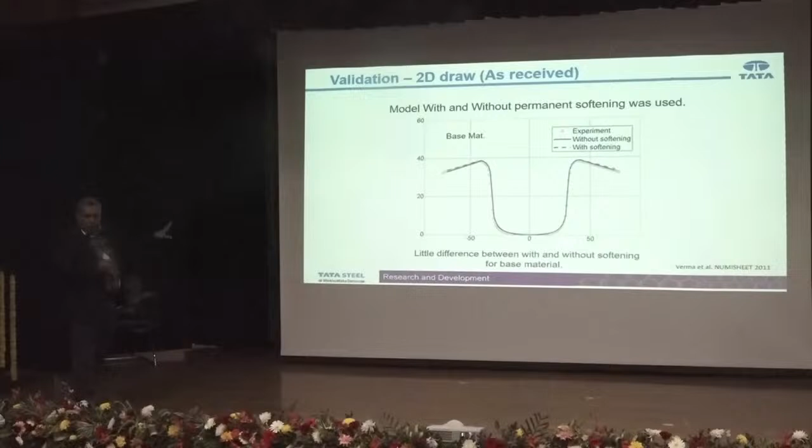Then the simulation was done using the in-house developed material model, and this is for the base metal - you can see for the base metal the prediction is very good.

But when we started doing the simulations for the pre-strain case, it was actually not working. So with softening versus without softening, we are talking about two different material models. You can see with softening actually predicts very well, whereas without softening doesn't predict it that well. So we said you need advanced material models with softening to predict the spring back more accurately.

The second area where we are working a lot is because one problem with such methodology is that many people do not have the experimental capabilities or facilities to carry out advanced tests, because some of these material models also require plane strain test or equibiaxial test, which is not readily available.

So how do you do that? How do you still use this? So we came up with the concept that can we do a virtual experiment? Now, how do we do the virtual experiment? So it's something like this.

Suppose we want to use this yield criteria, even the Hill's 48 yield criteria, we need to carry out 3 experiments, which is easy in this case because you just do the tensile test in 3 directions, 0, 45 and 90. But if you want to use Hill's 90 yield criteria or Barlat's yield criteria, you need to do equibiaxial test, etc., that facility is not there.

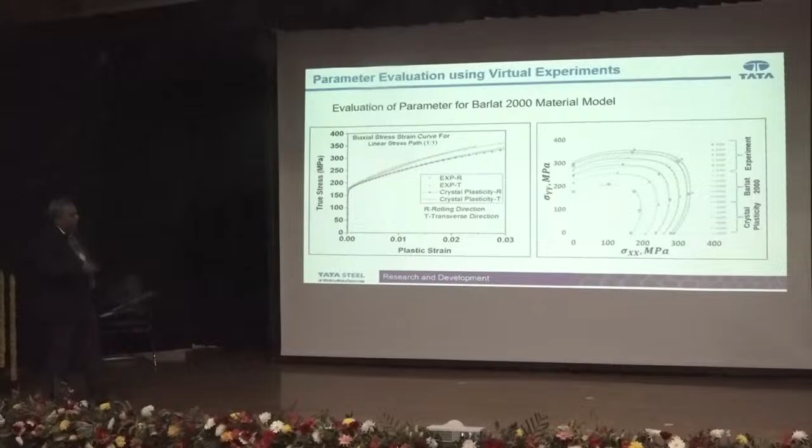Now this is the validation of such an approach with a biaxial experiment. So here what we did is, we did an equibiaxial experiment also in this material because we have that facility. And we did crystal plasticity based simulations, and then checked whether it is working or not. The match is very good, and this is the experimentally found out yield surface and the validation of that with the different models also. So it was very well represented.

And then we used the same to actually do the real life simulation. So what we did is we made a cup using the same steel for which we did all those experiments, and we measured the punch load when drawing this cup, and also measured the earing, the earing height. So basically the cup height is showing the amount of earing happening in this cup. And you can see prediction versus experiment using different models.

So one is YLD, the Barlat 2000 criteria, where all the coefficients were calculated using experiment, meaning real physical experiment. And this one, all the coefficients were calculated using virtual experiment, meaning the crystal plasticity based model which we had developed in-house. And you can see the prediction is quite good, both for the load as well as for the cup height, so there is hardly any difference. So we are confident that such an approach can also be used going forward for the testing, etc.

Now, the third category of project where we are actually involved is new forming technology development. One of the forming processes already being used by the automotive industry is hot stamping. Here what you do is, you have a boron steel, you heat the steel up to 900, 950 degrees centigrade, quickly transfer it to the die, do the stamping, keep the die in closed condition, and do die quenching, and then the complete microstructure gets transformed into martensite, and the strength you get in the final component is about 1400 to 1500 megapascal.

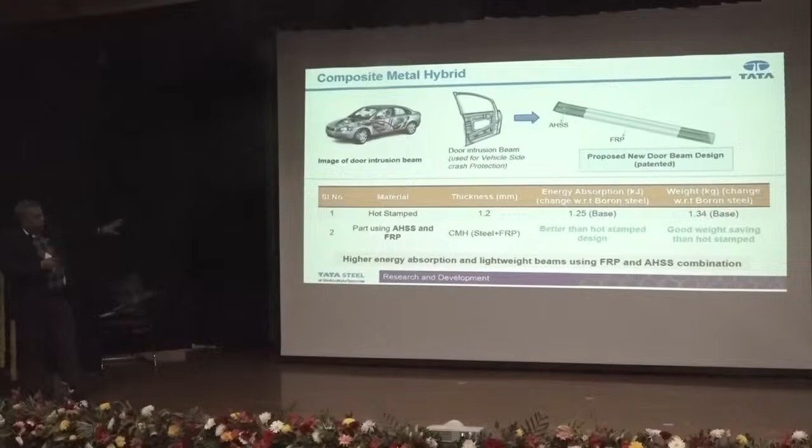So this is the problem we are trying to solve. This is also at the pilot scale. This is the last slide I have.

This was actually started by Tesla. It is now in commercial use. Tesla already has, I think, some 16 giga presses across the world, and there are 6-7 different companies, mostly Chinese companies, which have also invested in that.

Now the problem is, all of us know high pressure die casting is not a new process. The only limitation was basically the size of the component and the wall thickness you could make, earlier. That problem has been solved by making very large presses which can pump in the liquid or molten aluminum at very high speed. After that problem was solved, Idra, an Italian company, developed that press. After that, Chinese companies have come up with presses up to 15,000 tons.